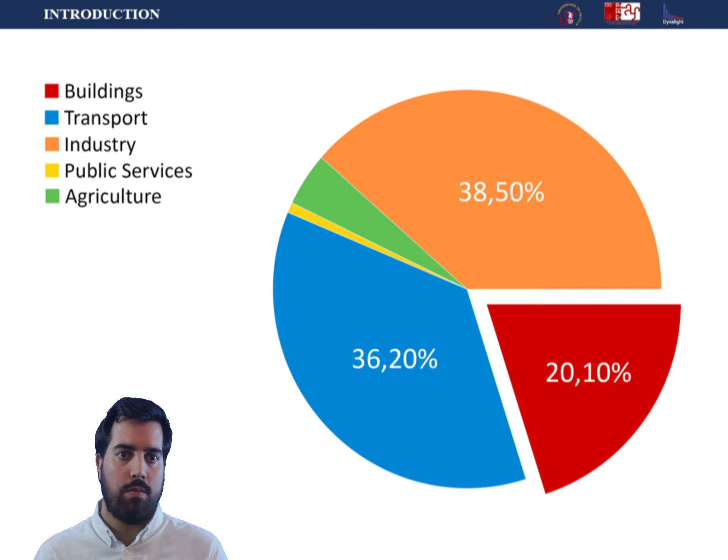In Spain, around 20% of the electricity consumption is made by buildings, and moreover, 28% of it is due to the electric lighting, so that making predictive computational models analyzed with dynamic metrics can mean a decrease in the electricity consumption, both due to the window size optimization and the use of smart controls of the architectural spaces.

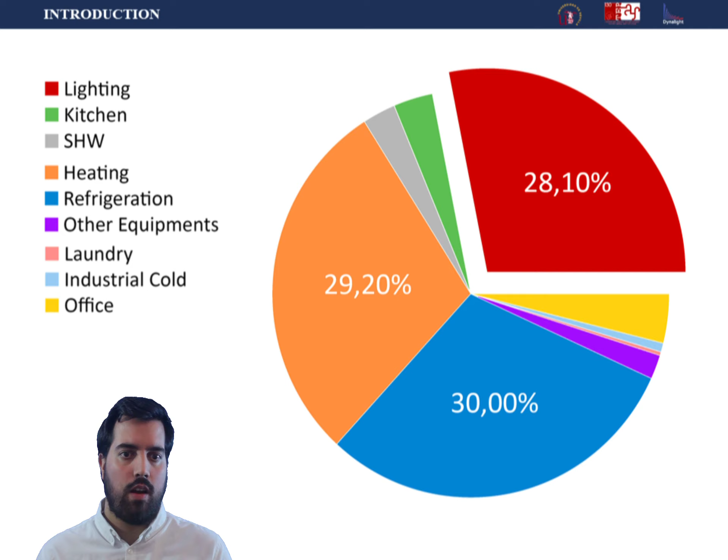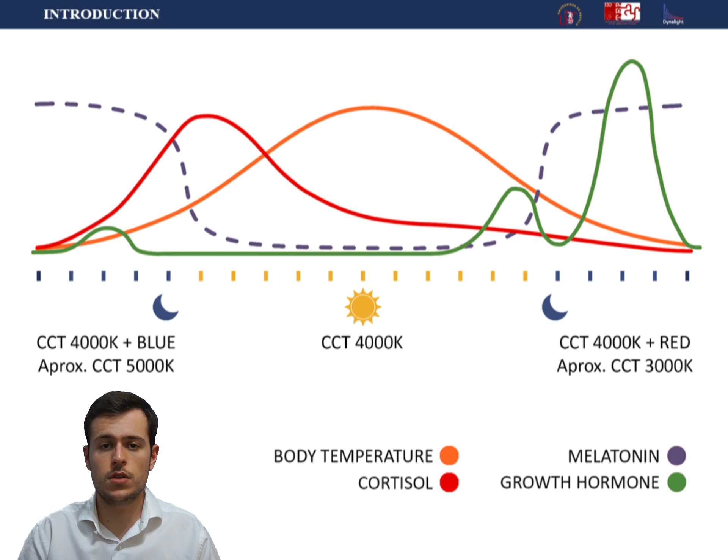Nevertheless, there is a casuistry that dynamic metrics do not consider, as many buildings have a temporary use throughout the year. For example, educational centers that have no use around the summer period. This type of building is highly widespread throughout Andalusia, where there are more than 7,000 public schools. So saving part of the energy consumed by electric lighting systems of these schools can result in large-scale energy savings. However, this dissociation of activities from daylight carries some health problems among humans, increasing the risk of developing some diseases strongly related to the desynchrony of the circadian rhythms.

The aim of this work is to develop a deeper research on the potential of a new lighting dynamic metric, the partial daylight autonomy, which has been previously introduced at the ICCAN of 2019. Thus, it will be possible to consider the non-use period of a space and so not oversize the penetration or amount of natural light that comes through its windows, allowing to fit window gap size to the real conditions and necessities of the room.

So as to verify the impact of this metric, it has been applied to a case study based on secondary school multipurpose classrooms, defined in a previous article, in order to check its behavior considering some concrete guidelines explained in a methodology based on mathematical and comparative analysis of results.

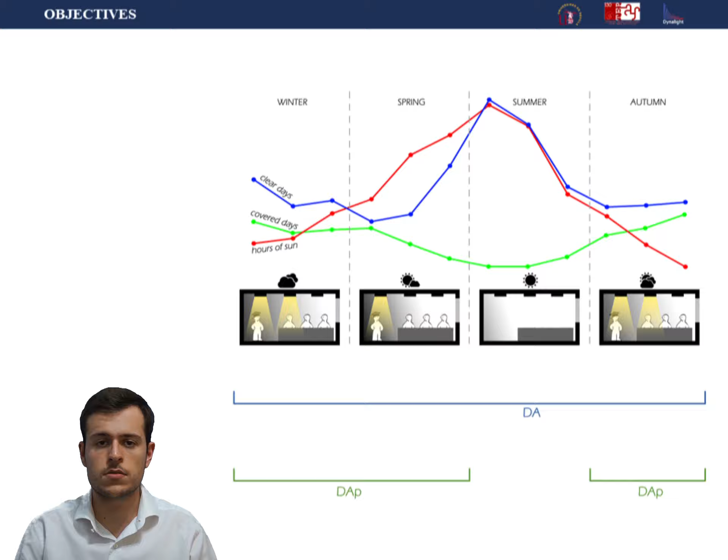The case study, which has been defined in the previous paper, consists of a conventional secondary school multipurpose classroom of 8 meters wide, 6 meters deep and 3 meters high, having a window gap size of 7 by 1 meters, meaning 30% of the vertical plane, oriented north and centered in the facade. The model has been located in Madrid, Spain, with a standard academic year, which means not considering weekends, and an uninterrupted schedule from 8:30 in the morning to 6:30 in the afternoon, and taking into account the DST. All that considering the recommended illuminance of 500 lux.

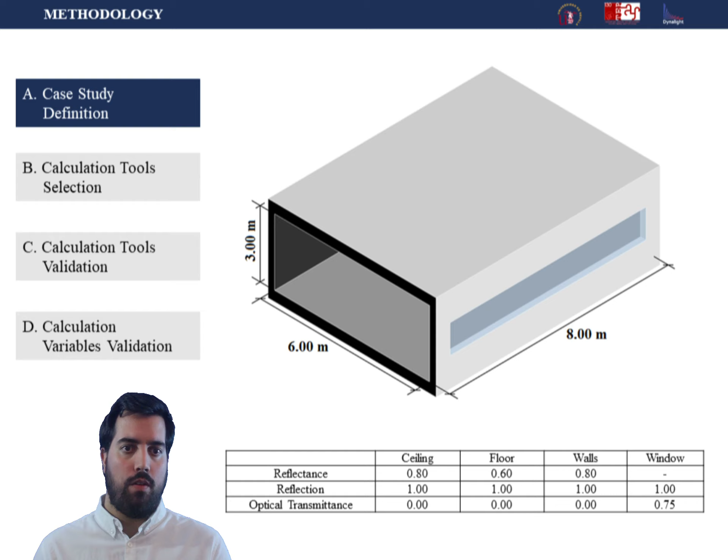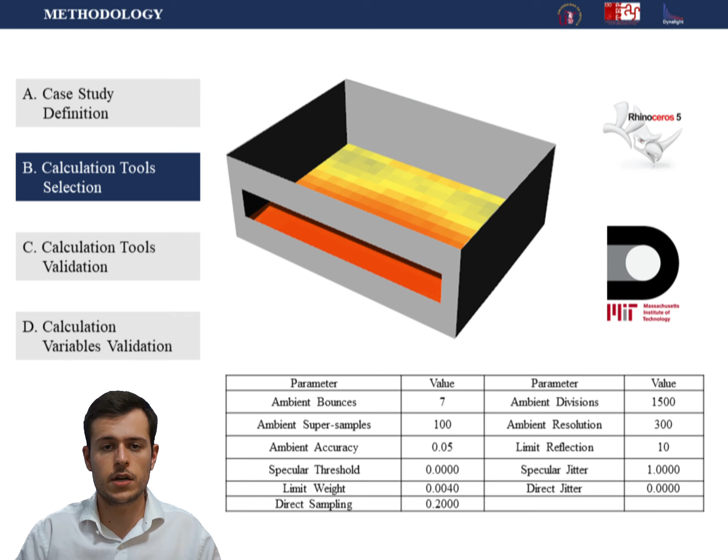For this validation, the calculation database and the experimental results are based on the previous publication of Campano and company, using the mentioned test cell. The cell is located in Seville, Spain, and it's characterized by dimensions of 2.4 meters wide, 3.2 meters deep, and 2.7 meters high, with a window gap of 1.16 by 1.08 meters corresponding to 20% of the vertical plane, centered on the facade and facing south.

The 3D model is generated in Rhinoceros and subsequently calculated using DIVA, thus obtaining the daylight autonomy values for an uninterrupted schedule from 8 in the morning to 17 in the afternoon, including DST, and two different illuminance thresholds of 100 and 500 lux. Afterwards, a comparison is made between the previous values obtained, both measured and computer calculated, and those obtained in the present study with DIVA. The maximum divergence among the values is lower than 10% in the worst case, so the validation of the tool

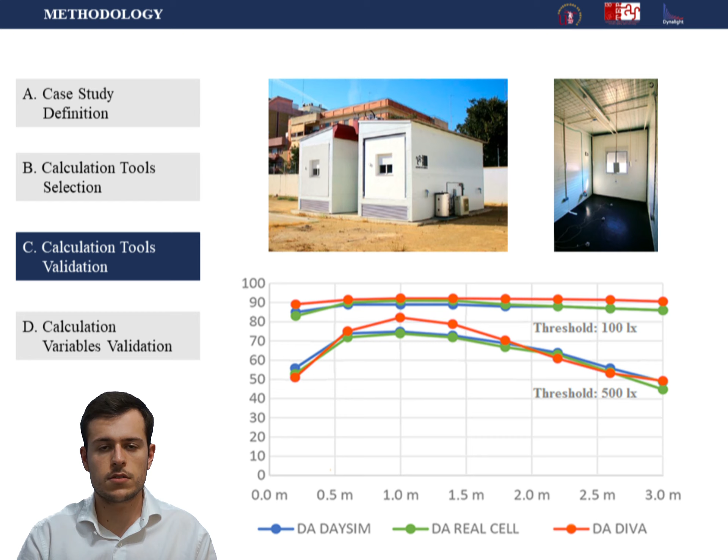is sufficiently correct. To develop this study, several variables have been considered, generating the following cases grouped into two sets. The first group refers to physical variables such as window size, which are 30%, 45% and 60% of the surface of the facade, and the reflectance of the materials, categorized as bright for high reflectance materials and dark for low reflectance materials. The second set deals with the variables of the model, such as the window orientation, which are north and south. All variables combined contribute to develop a case study with 12 variables.

Lastly, these cases are studied with seasonal occupation schedules, simulating the full standard year without holidays for the calculation of daylight autonomy, and on the other hand, the same year without occupation during July and August for the calculation of the partial daylight autonomy, or DAP, according to the Spanish summer vacation period.

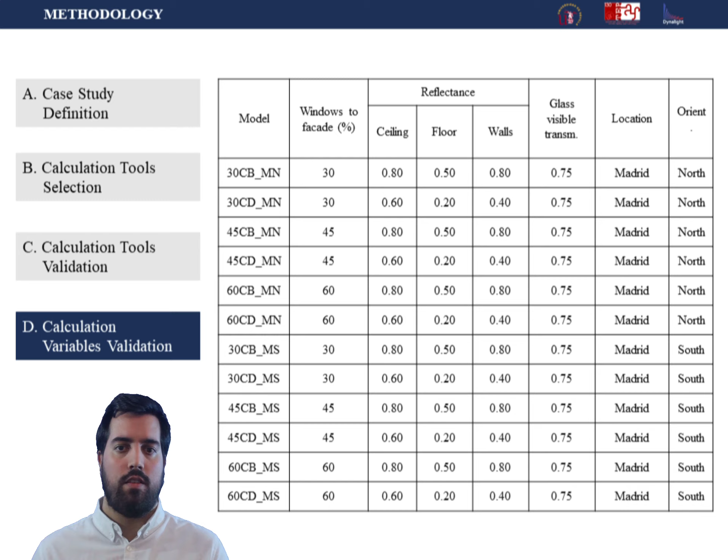The results obtained from the simulation process have been analyzed in two different ways. On one hand, a graphic analysis has been carried out, studying the pattern of each graphic to group them according to their behavior. On the other hand, a deviation analysis has been made, taking into account the mean and standard deviation of the calculation model, with the aim of understanding how each model behaves and what is the numerical impact of the use of DA against the use of DAP. Each casuistry, the ones in table 6, a total of 12, has been studied with DIVA twice, one considering all-year occupation, so obtaining DA, and another taking into account the non-use periods, obtaining DAP.

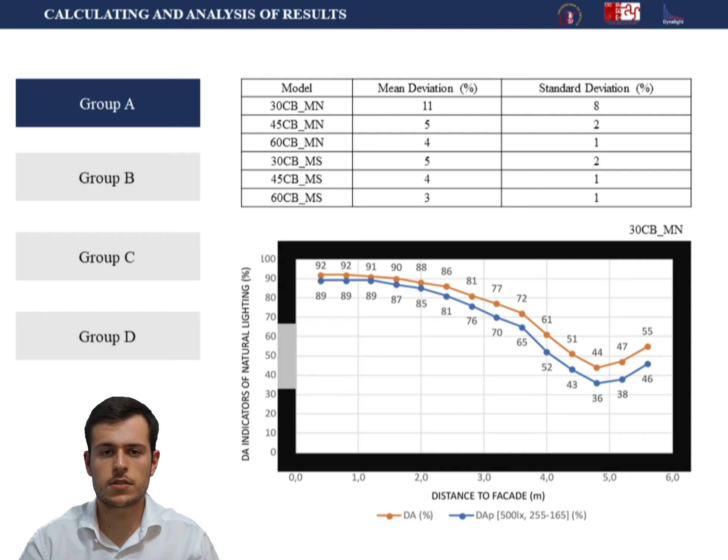The four behavior graphic groups are: Group A, where it's possible to find decreasing curves, DA always being higher than DAP, as they get away from the window, yet never reaching the value of 0. All the models with the bright reflectance level can be found in this group. Considering the values of DA and DAP, the deviation of every calculation node has been calculated. It's worth noting that a shorter interval of days will give a higher divergence between DA and DAP. Furthermore, those specific deviations have been taken in order to develop a proper deviation analysis, obtaining a mean deviation and a standard deviation, and this has been done with all the results.

In Group B, there are graphics which, though following the same behavior as those in Group A, reach the zero value when getting closer to the back of the room. The majority of dark reflectance level models are found in this group. Following the method defined for Group A, the mean and standard deviations have been obtained for every graphic contained in Group B.

In Group C, it is possible to find graphics with a similar beginning to the previous groups, but as they keep moving away from the facade, there is a crossing point of the curves so that the DAp gets higher than the DA from that point to the background. A reason for that is associated with the elevation angle of the sun in winter, compared to the one in summer, reaching a deeper penetration level to the background of the room and so obtaining higher illumination levels.

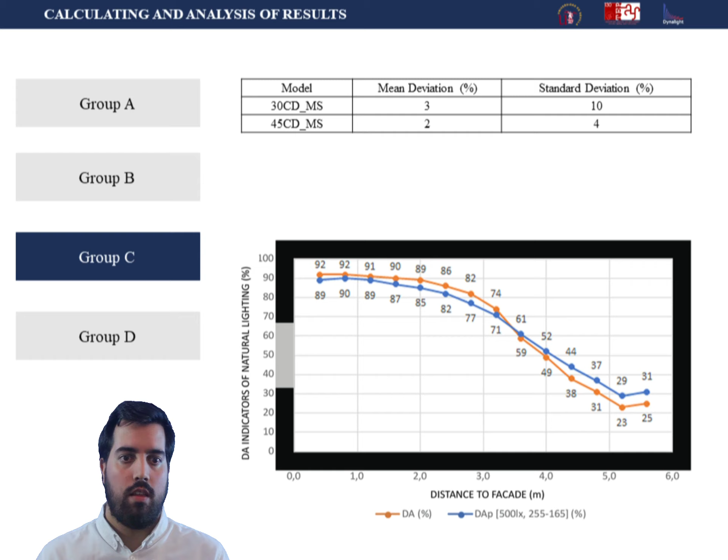A darker reflectance level and south orientation are the main characteristics for these graphics. Besides, due to that values line cross, it's possible to perceive the non-linear correlation between DA and DAp in many of the cases. Following the method defined for the previous groups, the mean and standard deviations have been obtained for every graphic contained in group C.

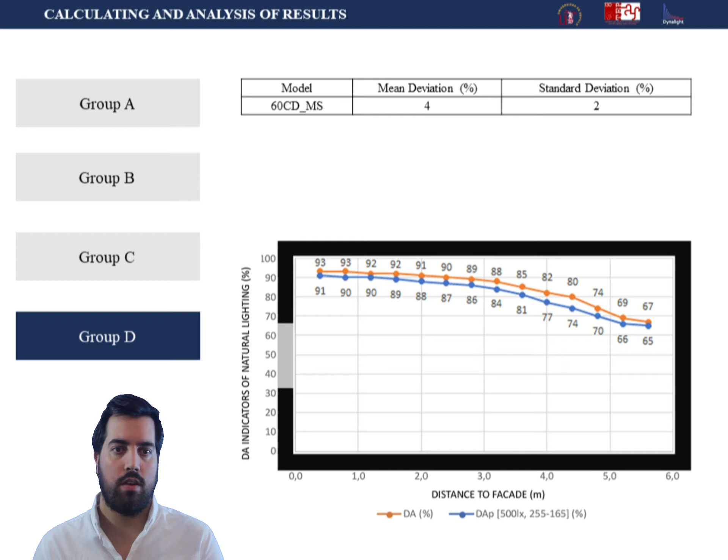In group D, graphics can be found that follow the same pattern as those in group A, although the values divergence is noticed to be decreasing as they get to the room background, tending to cross. If the depth of the case study room was higher, the behavior of this graphic would be as those in group C, showing the cross of DA and DAp curves. Following the method defined for the previous groups, the mean and standard deviations have been obtained for every graphic contained in group D.

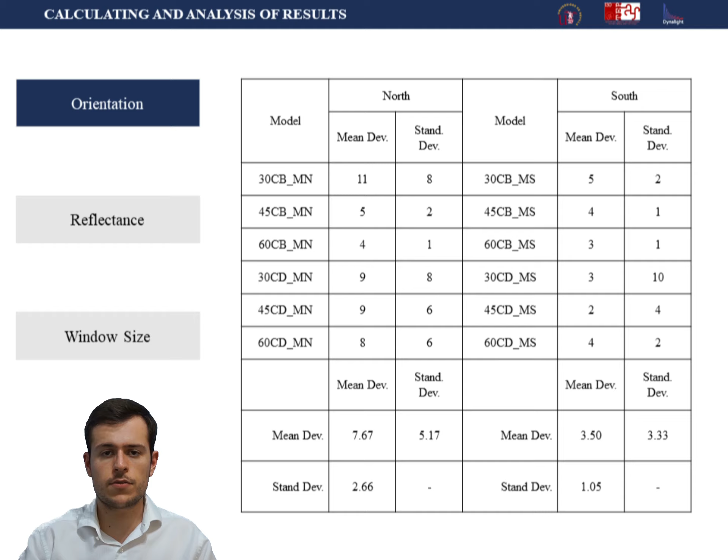Considering all the graphics and the divergence, a deviation analysis has been developed with the mean and the standard deviation specified previously, in order to be able to discretize what variables have a higher impact in the use or not use of DAp. They have been grouped considering the variables. About the orientation, the deviations are remarkable given that those in models facing north are higher, so it is possible to qualify the better efficiency of DAp for north orientation rather than south ones.

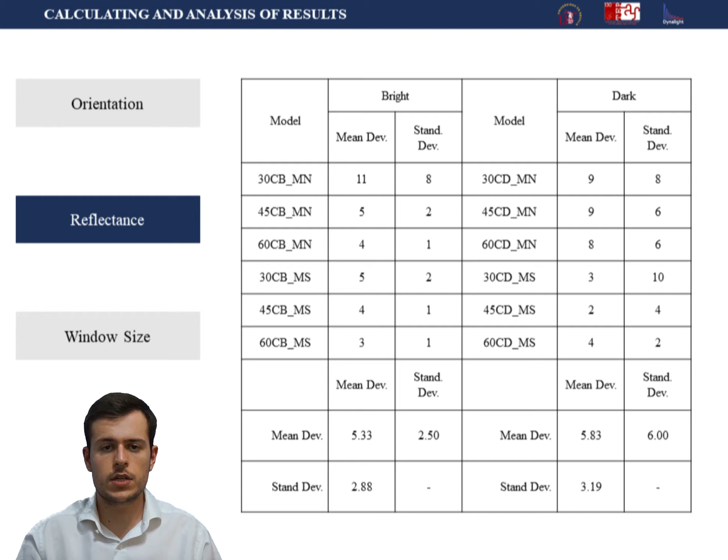Regarding material reflectance, variables deviation are found in the same range of divergence, so that it is possible to affirm that DAp would mean an improvement whether the materials of the space have a high or low reflectance. About the size of the window, the deviations are similar and so efficient independent of it. Yet a slightly higher deviation can be appreciated for models with 30% window size rather than those with a 45% or 60%.

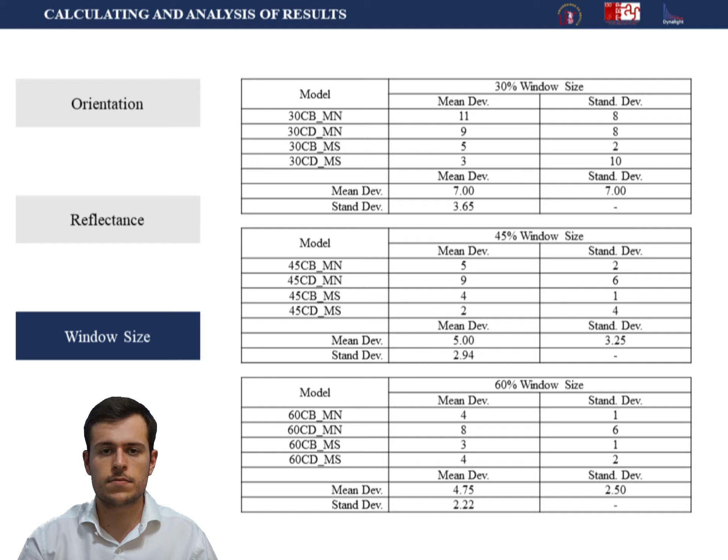According to the results and deviation analysis, the use of this new dynamic metric, partial daylight autonomy or DAp, means a better fit in the results of daylighting calculations for spaces characterized by seasonal use. In accordance with the previous statement, the usually lower value of the DAp metric means that a building with a seasonal use requires a higher energy consumption than the estimated in electric lighting during the period of operation, in comparison with a continuous use building, due to the fact that the summer daylighting is not considered into the calculation.

Quantifying the previous deduction, the autonomy of daylight can fall up to 24% depending on the orientation, window size, and the study point. Furthermore, according to the previous analysis, it can be noticed that a higher level of exposure to diffuse radiation on the model means a higher divergence between DA and DAp indicators, so that north-oriented models are the best example for the use of the DAp metric. On the other hand, reflectance and window size do not play such a big role in this decision, yet its use is still an improvement in the results and more faithful to the real necessities.

Besides, the nonlinear correlation between DA and DAp metrics has been demonstrated, meaning a huge importance of the use of this new dynamic metric that cannot be defined directly from the DA. To sum up, this research demonstrates the great importance of considering the non-use periods of a space in order to develop its lighting study, so that the use of this new partial daylight autonomy metric becomes highly recommended.